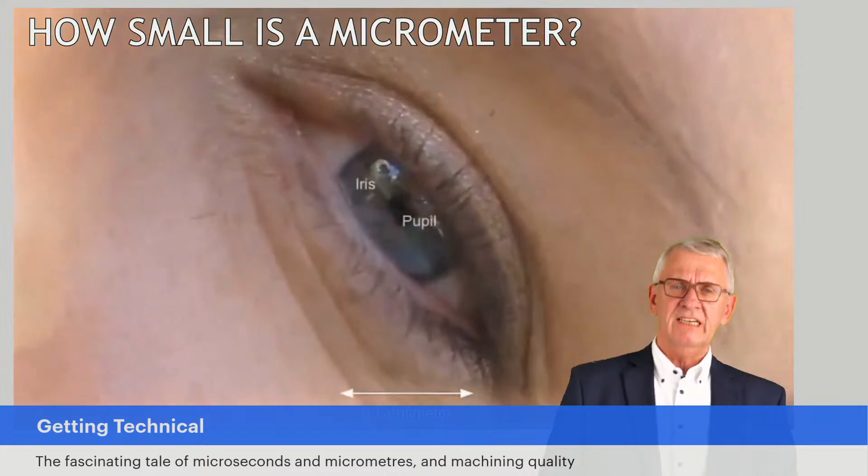And we talk about, as I said, microns. A micron is nothing, but chasing a micron, being it a micrometer or a microsecond, can cost a fortune. And we have to realize that whole discussion about quality, and micron here and micron there, is a matter not only of technical stuff, it's also a matter of money and time. Let's first put things a little bit in perspective.

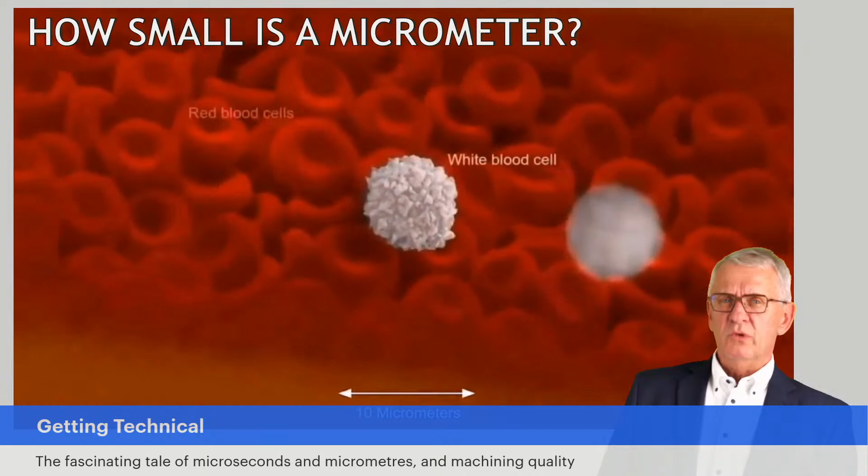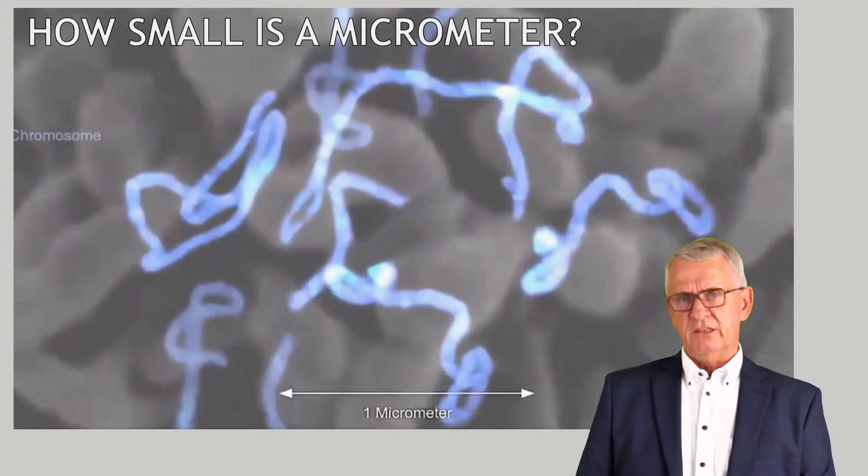If we talk about a micron, a micrometer, normally what we talk about is on the level of chromosomes in the human body. That is what we are talking about. That is what 1 micron is. So if we have a discussion in the machining world, if machining people are standing together and they are talking quality and dimensions and stuff, and a micron more and a micron less, we should realize that what we talk about is very, very, very tiny.

And if we talk about a microsecond, also here to have an idea what we talk about, a microsecond, if you compare a microsecond to a second, well, it's the same type of comparison like of a second within 11 and a half days. And people say then, 1 second compared to 11 days, that's nothing. Exactly, that's my point. A microsecond, if the discussion is about microseconds, and I think here on things related to machining time and time in contact and all those things we discuss in machining, be careful when you use the word micron, micrometer, or microsecond. It's very, very, very little.

And as I already said, it refers to quality. And quality, most of the time, when we talk about quality, there is that sense of, how should I say, a feeling of, is it all really needed? Because quality costs money and time. And there is that constant chase for cost reductions and increased productivity. So quality, but it costs money and it costs time.

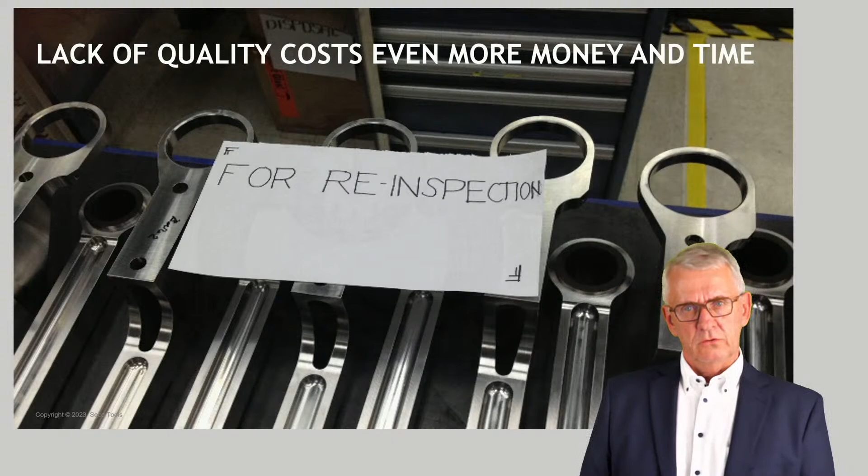But you have to see it like this: lack of quality costs even more. So it's not a matter of discussing how much quality costs or how long it takes to reach a certain level of quality. It's more a discussion of, if you don't have it, quality I mean, what is it going to cost you then? Being it in money or in time.

And money and time is one thing, but quality, or the lack of quality, it's a bit like that traditional comparison. People say it's like an iceberg. There's a little top of it above the water level where you see things, and then people say, when you talk about quality, lack of quality, it's about scrapped work pieces and rework that needs to be done and all that type of stuff. But lack of quality is so much more.

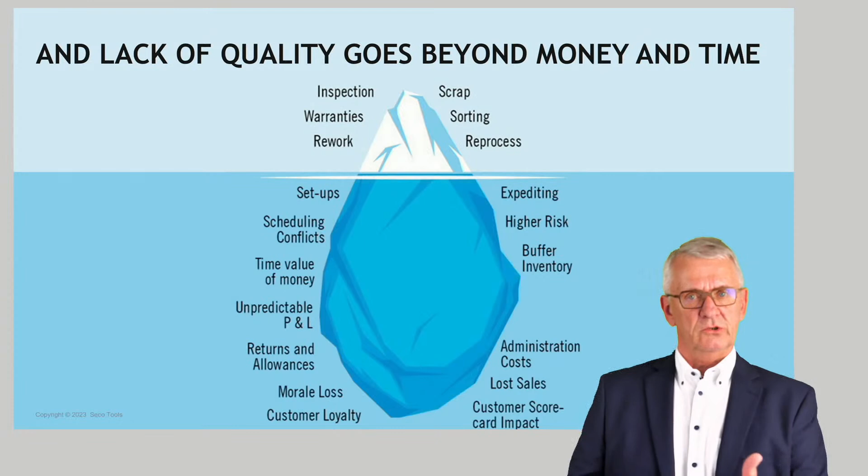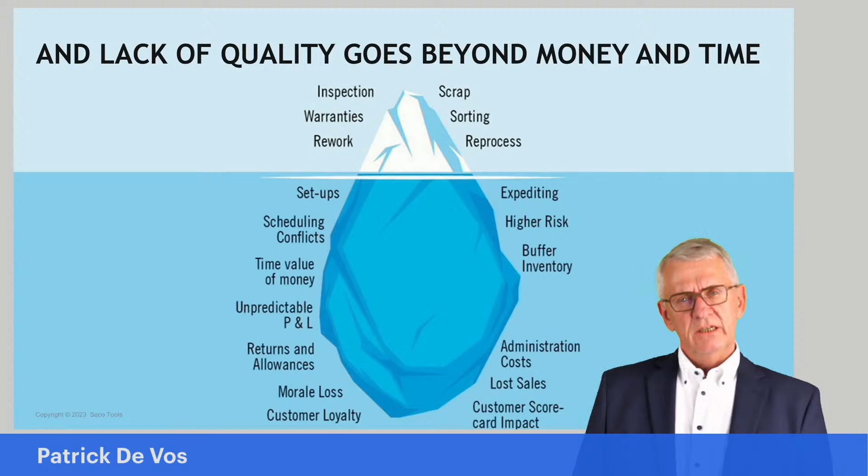To take one example, perhaps people are not always thinking that delivering lack of quality is going to cost you image. Because if you deliver a workpiece which does not have the quality which was requested, you are not only going to have a customer calling you and saying this is no good, but you are also going to have a customer starting to doubt you as a supplier of workpieces or whatever you produce in your company. So lack of quality is costing a hell of a lot of money, time, and so much more.

So we better spend some attention to it. And if we talk about quality, there are in machining, or in manufacturing in general, perhaps two families of quality. One refers to the process quality, the manufacturing system quality. That is when we start talking about the process we use to produce workpieces, in our case machining, and to which extent does it deliver what it is supposed to deliver. And that is correctly finished workpieces, and I'll come to that part within a second, but also correctly finished workpieces in the predestined or pre-calculated time, with the different cost factors related to it respected, and so on and so forth.

And if we start talking about rejected workpieces, a percentage of rework, extra processing, all that type of thing, that refers to what I call the quality of the process, the quality of the production system. That's one family. Another family is the very straightforward workpiece quality. Are the dimensions correct? Is the shape correct? Is the surface roughness, the surface integrity?

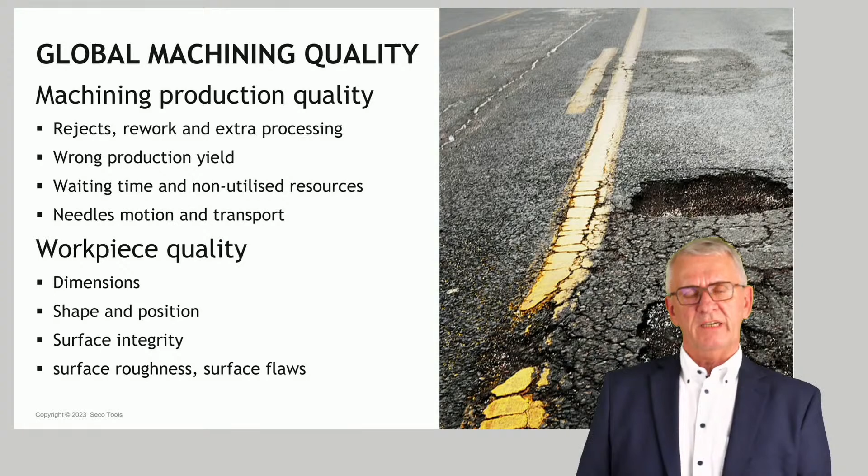Are all the demands which are around the workpiece respected? Then we talk about workpiece quality, and the main subject of today is workpiece quality. But still, I want to mention a few words on production quality, process quality, because this is more about

if you look to the process itself, the production system itself, to which extent does it manage to deliver without too many rejected workpieces, or without too much unexpected downtime, without too much problem solving time that is slowing down the process, all those type of things that in the end would influence the total cost picture, the total manufacturing cost, or the total productivity figure. Those things, that is what we refer to when we talk about production quality.

Production quality is about how well do we spend our time? Do we spend the available time we have for production? Do we actually spend that as much as possible to produce correctly finished workpieces? That one could define as production quality.

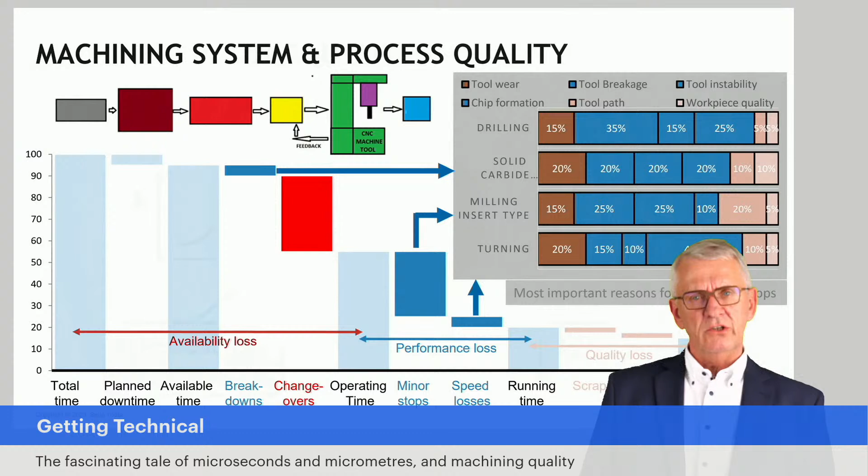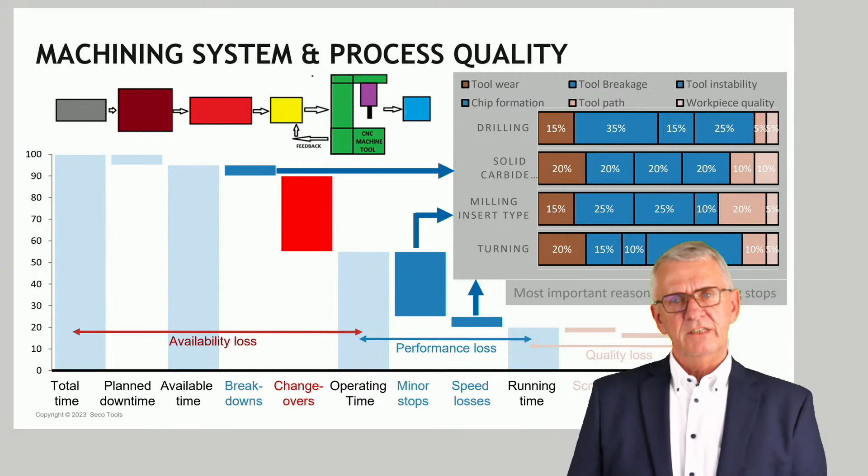And if you look to the process itself, the technological side of it, there it's about to which extent do we manage to run the process, the machining process, without too much unexpected things happening that would lead to unforeseen standstill. To which extent do we manage the production process, the machining process, that we don't break too many tools? That the quality of the finished workpiece is in line with expectation, that we have to stop the machine because there are issues with too long chips, all those type of things,

that is connected to process quality, production quality. It's about mainly trying to avoid those things, or at least minimize, so that the available time on a machine is used to do what it is supposed to do, correctly finished workpieces. That in a nutshell. There's so much more to be said about this.

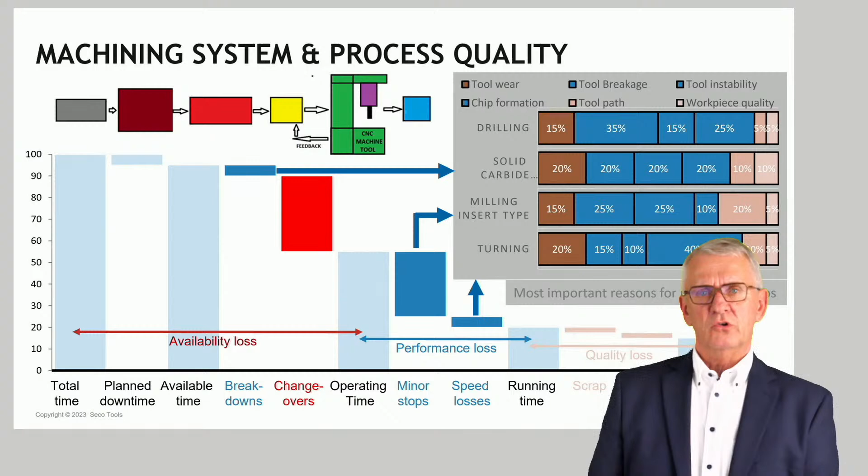If we talk about production quality, production system quality, a word that pops in my head instantly is what people refer to as manufacturing excellence or production excellence. Perhaps we could say production quality is a bit the same as manufacturing excellence, or I don't know. It's just something I put on the table here to think a little bit about.

But as I said, the main subject of this session is workpiece quality. Now, if we talk about workpiece quality, we have to finish a workpiece or a batch of workpieces, and those workpieces, there are demands. There are demands about the dimensions. There are demands about the shape of the workpiece. There are demands of the different features or elements in a workpiece, how they are positioned compared to each other.

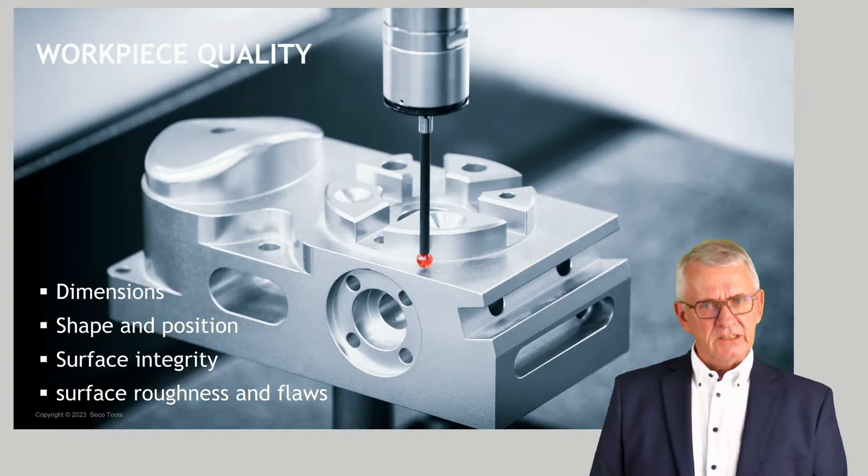There is the aspect of surface integrity, which is a very important thing in some types of industry. I'm thinking here mainly on industry segments like aerospace, medical industry, where surface integrity is a very major thing. There is the surface roughness, surface flaws, all those things. That is what we talk about when we talk about workpiece quality.

And workpiece quality, what we have to realize is that it's an equation with quite a lot of variables. And if you try to rank the variables, at least in families, part of the quality of a workpiece will be depending on the tooling you use, the type of cutting tools and how you use them, and the cutting conditions and all that type of things.

Part of the quality variables are workpiece variables. The workpiece itself, the material, the shape, the dimensions, type of material, as I already said, and so on. Part of the variables comes from the machine tools you use while they are cutting. How accurate can they move? How stiff is the structure? To which extent are the machines capable of running without vibrations? All that type of stuff.

A number of variables are also coming from machines, but machines while they are not producing. Perhaps a very strange family of variables, but what I try to put under that umbrella is when a machine is standing still, that is, for instance, perhaps because you are mounting a rough workpiece. Now, the accuracy with which you mount a workpiece is a variable, is an influencing factor for the final quality of the workpiece. And that accurate mounting of workpieces is something which is done while the machine is standing still. That explains a little bit what I mean with the variables in the family coming from the machines during downtime.

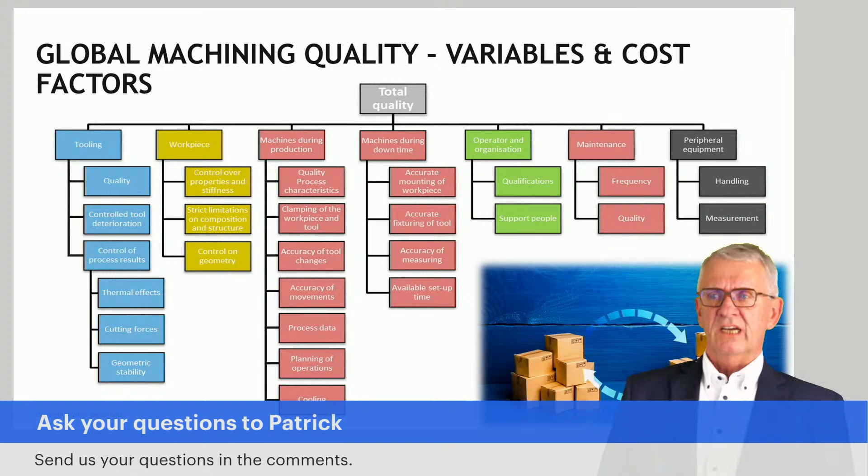I've been talking about process quality and about workpiece quality. It's typically human to classify—we always like to rank what is highest priority and what is not. Now, if you think about these two types of quality, workpiece quality or process quality, what do you think is the most important one? If there is a conflict, which one should be prioritized? That's what I mean here, because sometimes there is that conflict.

To reach a certain level of workpiece quality, you may have to sacrifice some process quality—spend more time, incur higher cost factors, and so on. So put it in the comments, I'm always curious how people feel about this. Is it workpiece quality, or is it process quality that's most important?

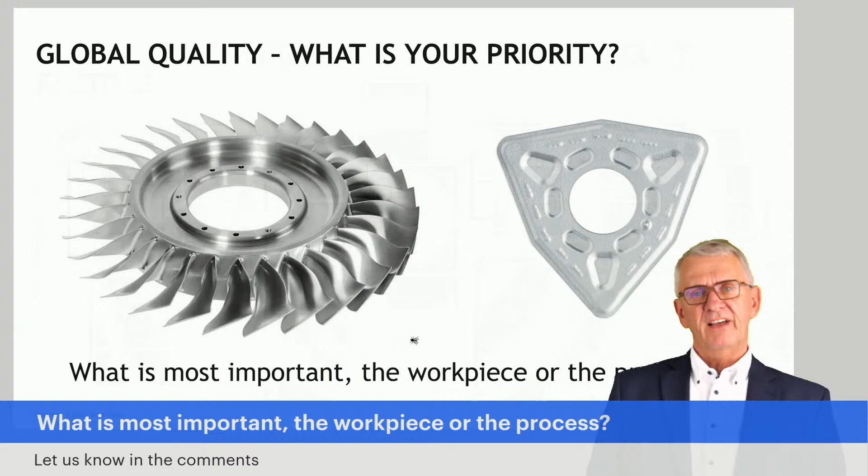Perhaps we should answer this question in the opposite way. What would be the consequences if we don't manage the quality, if we fail to achieve the needed quality? Think of delivering a workpiece with compromised quality—the result could be that the equipment it's used in, say an airplane, fails to function. And we all know the consequences of that. If, however, the process fails and the tooling costs go beyond what was determined, well, that's unfortunate, but there's no more to it than that.

So if the question is raised, what do we prioritize—workpiece quality or process quality, technology or organization? I think workpiece quality should be the highest priority, if you think about the consequences. As I said, I answered this in a negative way: what would happen if I don't have the quality I need?

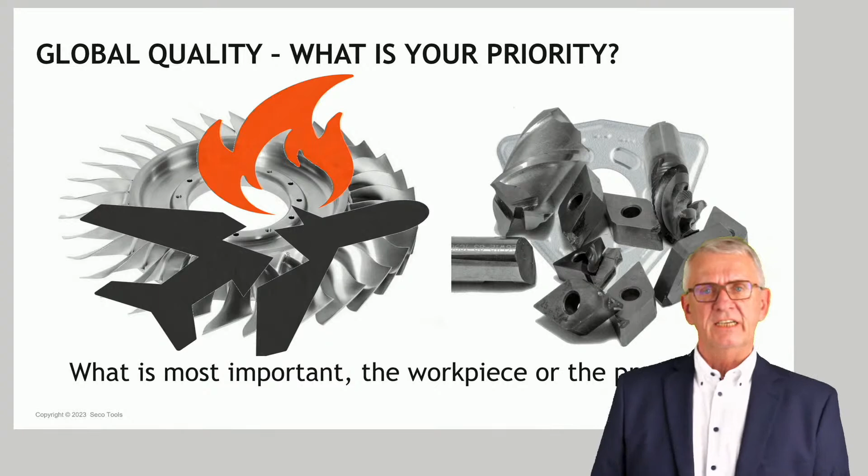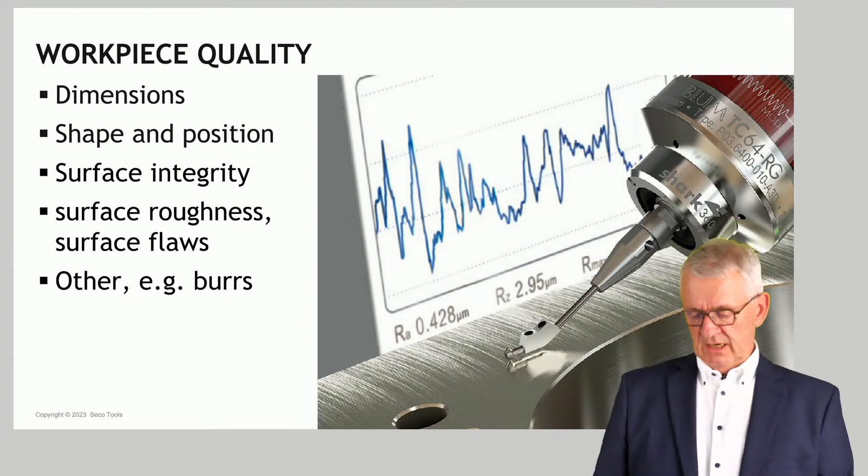Workpiece quality is the main subject here. There are quite a few things we should talk about: dimensions, tolerances on dimensions, shape, the position of certain features on a workpiece, surface integrity, surface roughness, surface flaws, and other elements like burrs—exit burrs, micro burrs, and so on. If we try to classify: dimensional quality, shape quality, and position quality. In other words, do I manage to machine a surface so that it has the correct shape—flat, cylindrical, or whatever is demanded—that it is positioned where it's supposed to be, and that it has the dimensions we ask for within given tolerance bands.

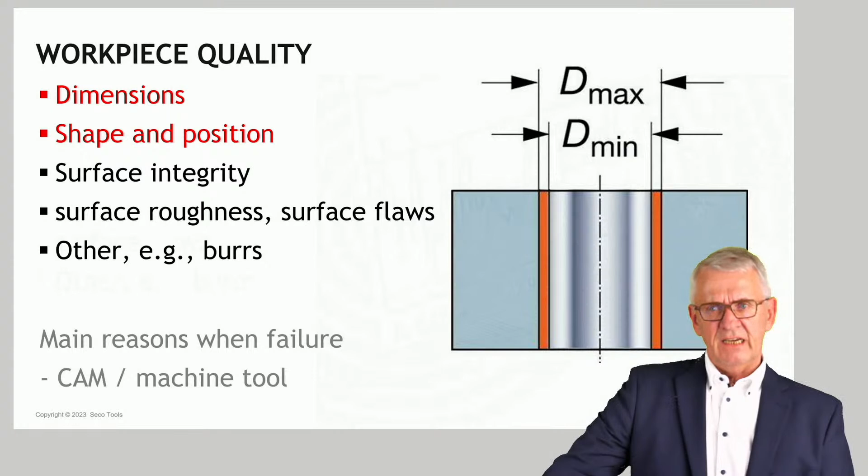And if we fail here, what's important is: okay, I did my machining, I check the result, I see the result is not in line with expectations, so I need to correct. The main reasons—not the only reasons, but the main ones—for issues with dimensional, shape, or position quality are the machine tool itself, and what I call CAM here: how you determine the movement of cutting tools over or into a workpiece.

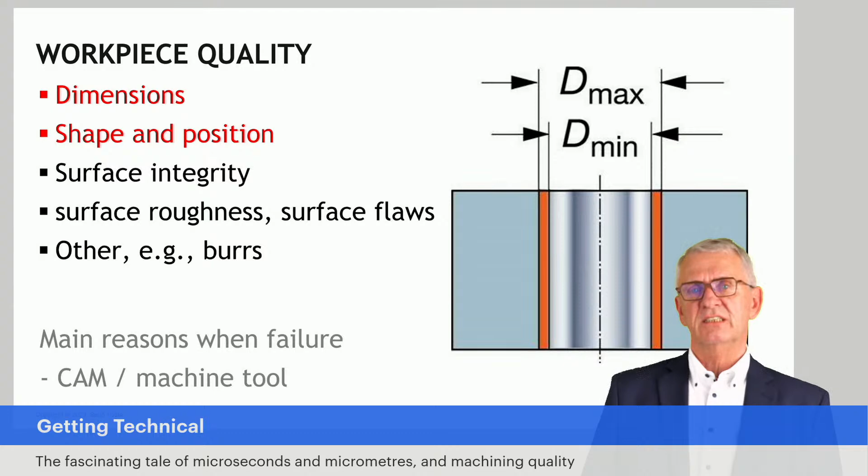Now, I'm pretty sure quite a lot of people now throw up their eyebrows and say, wait a second, what about this and what? I know, but mainly if you have big issues here, it's about machine tool accuracy, stability, movements, and it's about how the tool is part of it. Is it accurate? Is it what it's supposed to be to generate a certain form?

Surface integrity. Now, surface integrity and surface roughness, I always have a bit of a problem here, because depending on who you ask, for some people, surface integrity and surface roughness are two different things. For other people, one is part of the other. So for the moment, let's keep them together.

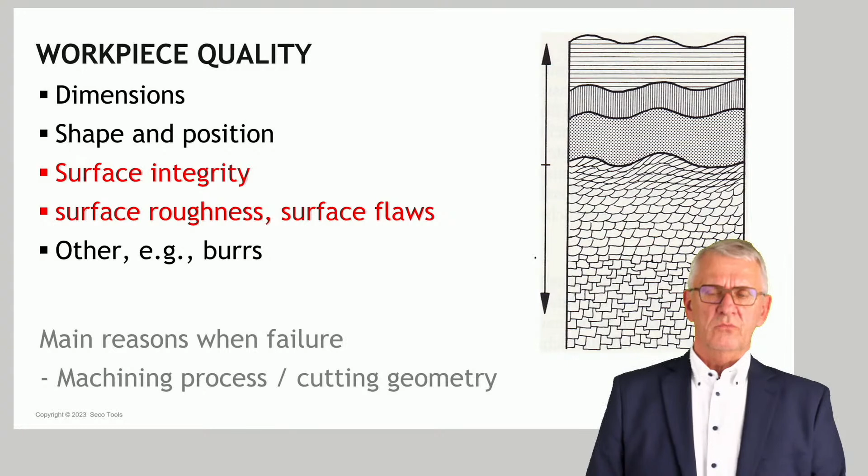If we have issues with surface integrity, surface roughness, or surface flaws, the main reason is the machining process itself. The phenomena happening during machining are such that the machined surface is not in line with expectations, and or closely related to it, it's about the cutting edge geometry. Don't worry, I'm going to come back to that. But clearly, if we are unhappy due to integrity, surface roughness, or certain surface flaws we see, we have to look at the machining process and see what went wrong, and or the cutting geometry of the tool we used.

Now, surface integrity is defined as describing the properties and the condition of a machined surface with regards to the surface itself and the subsurface, the part just below the surface. And here, as I said, some people say, yeah, the shape of the surface topography is part of that, because it's the condition in which a machined surface is. There are arguments to accept that.

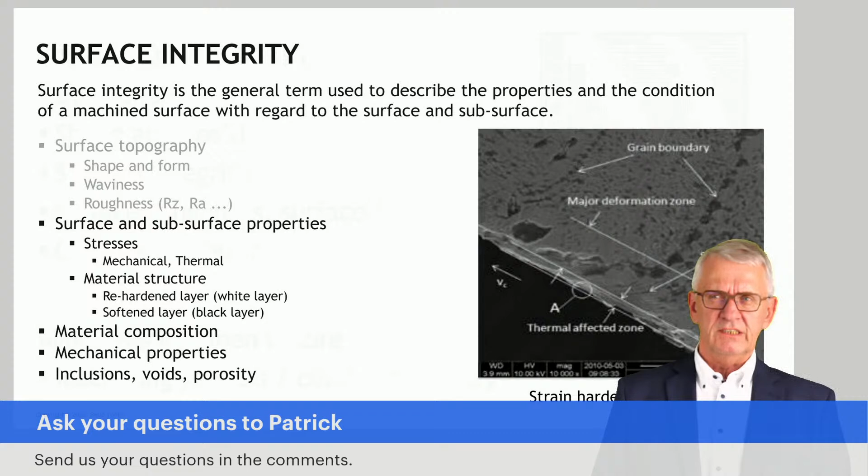But personally, I feel more to say that surface integrity as such relates to the material. The material which we see on a surface, the material which we see just below the surface after being machined. Did we change the structure? Did we change certain properties of the material? Did we leave certain stresses or tensions in the material? Did we add or modify the composition? All those things, that is what for me is surface integrity.

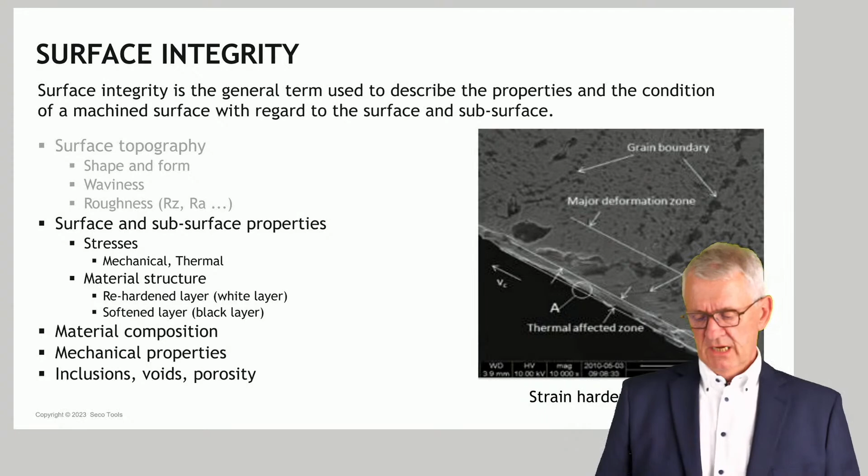Surface topography, surface roughness is a different thing. In other words, if we talk about surface integrity, it's more a metallurgical thing. It's looking into the structure of a material after it has been machined and evaluating if the surface material, or the material just below the surface, has been changed, and if the changes are acceptable or not.

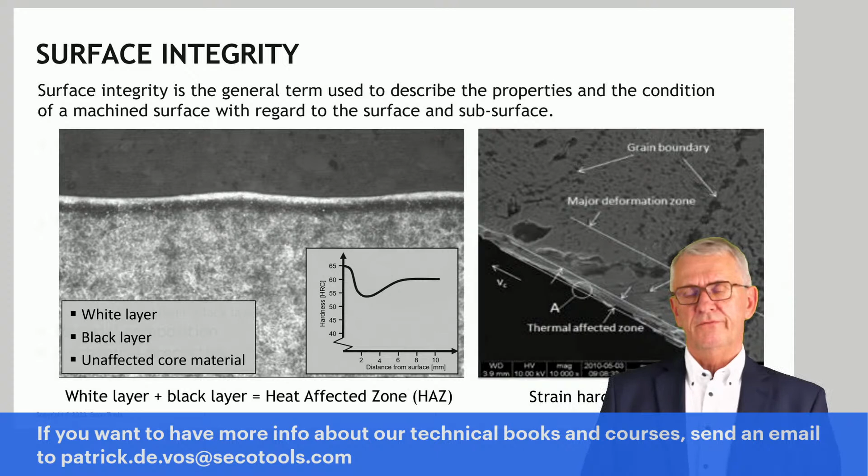This is the domain, and some of you are most probably familiar with it, where people talk about a white layer or a black layer forming after machining, or the heat affected zone in a surface. Very typical, you find this type of discussion with people in, for instance, the ball bearing industry. People in aerospace talk about these things. The medical industry, where a workpiece is going to be put in a human body, and then the material as such is an important thing. That is surface integrity.

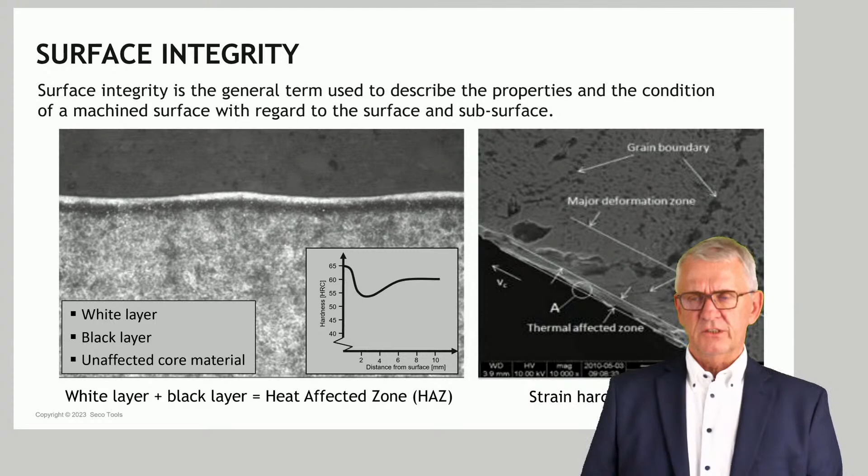And then you have burrs, which is quite an important thing in machining. There are different types, but this is a subject on its own, I just want to mention it here. Surface burrs which are formed during or after machining. Also here, if you are aiming for what people refer to as burr-free machining, so no burrs are being formed during machining, one could say, yeah, what's the big problem here? If a burr is formed, an exit burr or something, afterwards you remove it, end of story. Now, be careful with that, because if you look into that simple thing, burrs are being formed during machining and you have to remove them afterwards, which is referred to as a deburring operation.

A deburring operation costs money, takes time. I once had a case with a customer, and the production manager there told me that deburring as such stood for 20% of the production costs. And then we talk about serious stuff. Now, if you are in that case, if deburring is an issue, there are two ways you can work.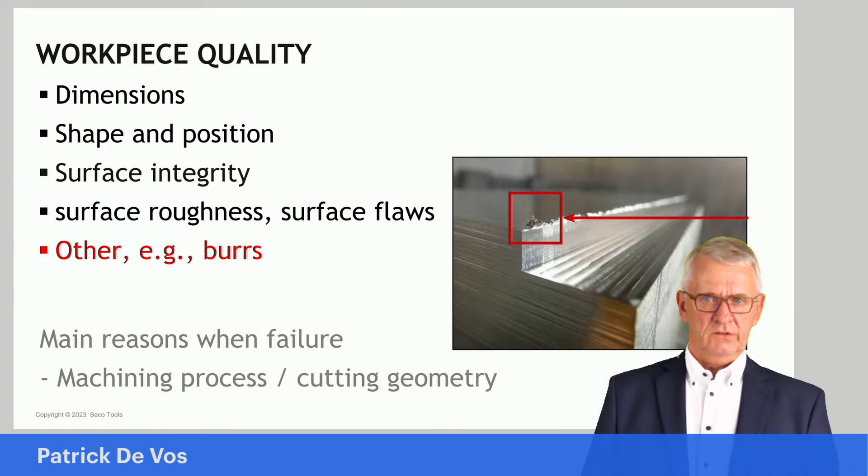Burr formation is very clearly related to the machining process itself, and also the cutting geometry of the tools you use. Those are the two things we need to discuss when we talk about burr formation.

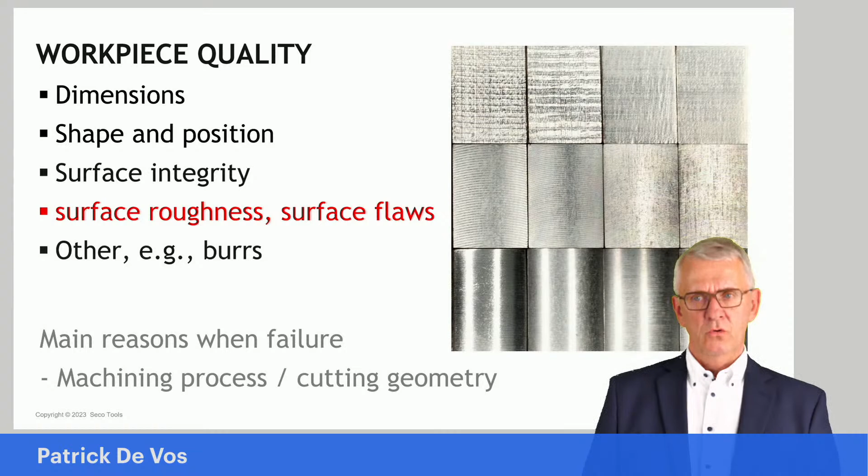But let me go back to surface roughness, surface flaws. As I said, some people consider it part of surface integrity. Me personally, I feel more inclined to call it a chapter on its own. And to fully understand surface roughness and flaws in a surface, we need to dive in a bit more into the machining process related to the workpiece material being machined.

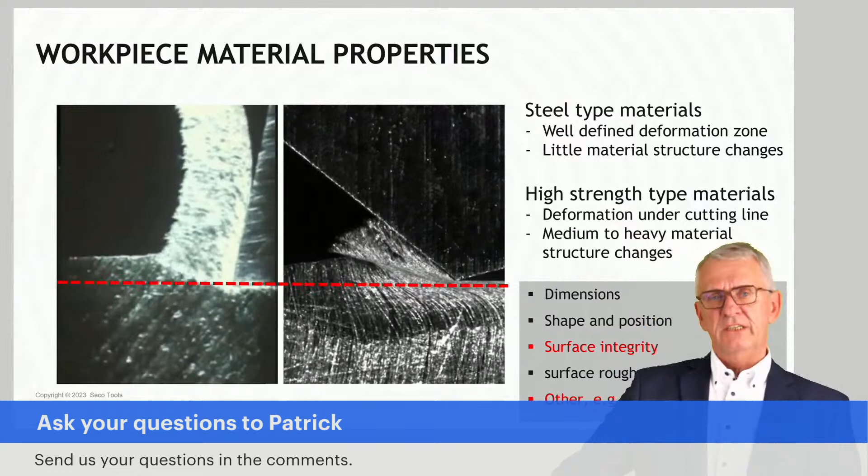You see here two videos demonstrating two types of machining processes. To the left, you see a machining process in steel type materials, the classic, traditional approach. We see machining taking place here, a tool is pushed through the workpiece material, the material is deformed, it's sheared off and evacuated in the form of a chip. The red dotted line represents the machined surface, and what we see is that the surface is rather smooth.

To the right, it's not really a simulation, it's actual machining you see there. What I try to simulate with this video is how machining takes place with high strength type materials, typical heat resistant materials, high strength, Inconel type materials. A machining process leads to a certain deformation taking place under the cutting edge line, which kind of represents the machined surface. Due to the nature and properties of certain materials, the workpiece material itself is being deformed below the surface, and that deformation leads to different properties of the material.

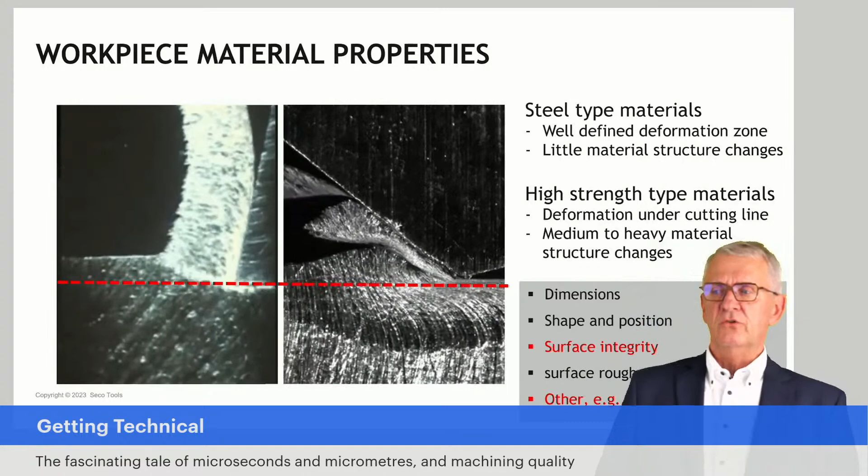Now, this is a very simple thing: it's either acceptable or not acceptable. If it's not acceptable, and here we talk more about surface integrity, then we need to do something about it. The phenomena I'm drawing your attention to here has a high impact on surface integrity and surface flaws. Certain parts of a surface can look a bit awkward when this takes place. This will influence burr formation, which is what we have to think about here, very strongly connected to this phenomenon.

And people would ask me, okay, you talk about high strength materials, why high strength materials? What makes them different from others? Well, that's the strain hardening tendency of those materials. If you look at machining, machining is a deformation process. You deform material until it shears off, and that deformation of material, what I try to visualize here with this little movie, you see just below a cutting edge that the material structure is being deformed.

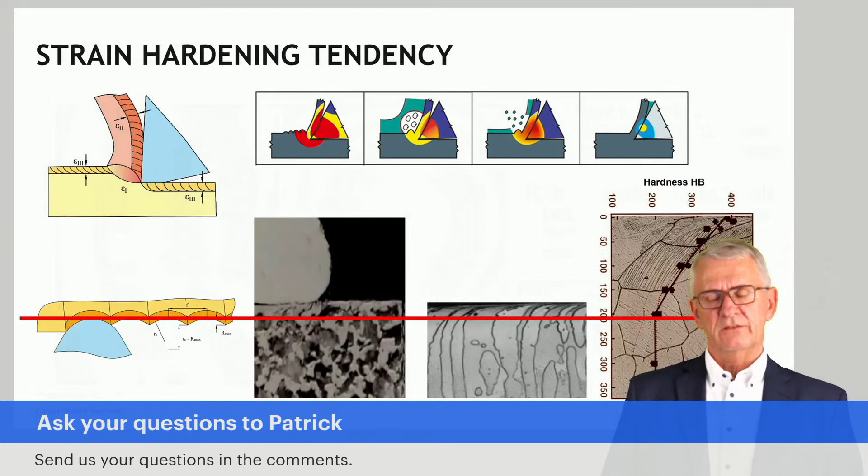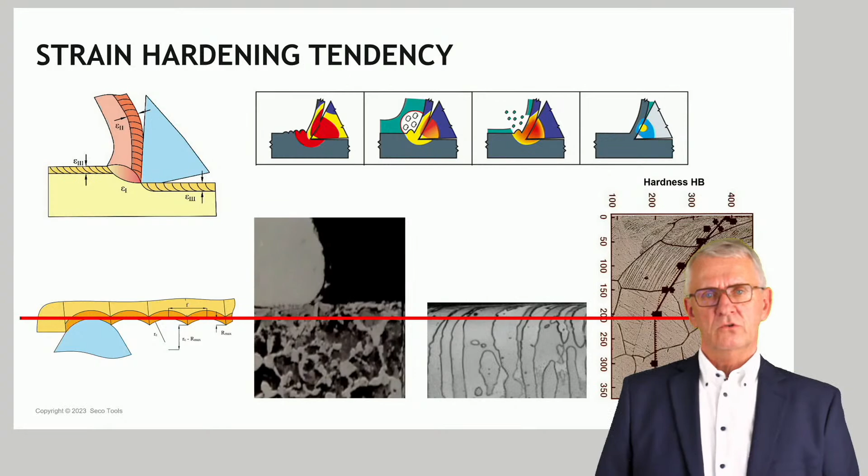This strain hardening tendency we see in a number of materials. Temperature is a catalyst for this. So if we dive into this situation, the whole discussion we have in machining about whether to use cooling or no cooling relates very much to this aspect in machining. When we have strain hardening tendencies, which we find quite a lot in high strength materials and heat resistant materials, the whole discussion about cooling, no cooling, which type of cooling, is a very important one.

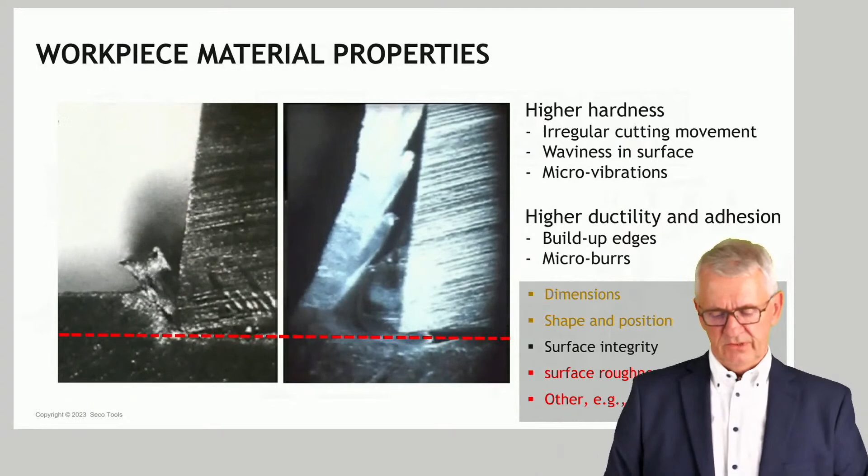It moves a bit randomly, and that movement, that relative movement, is going to affect the form of a surface. If you machine softer materials, the example here is aluminium, and if your cutting conditions or your cutting geometry is not what it should be, and you end up, for instance, in a situation where build-up edges are being formed, what you see happening here on the video, again, you see that the machined surface, just below the dotted red line, the shape of it, the form of it, starts to be very irregular.

So, hardness of workpiece material, softness of workpiece material will have an impact on surface roughness, surface flaws, and burrs. Also, of course, some other quality things will be influenced, but these will be the main ones: surface roughness, surface flaws. In other words, if we talk about surface quality, if we talk about workpiece quality, the material aspect is always there to take into consideration.

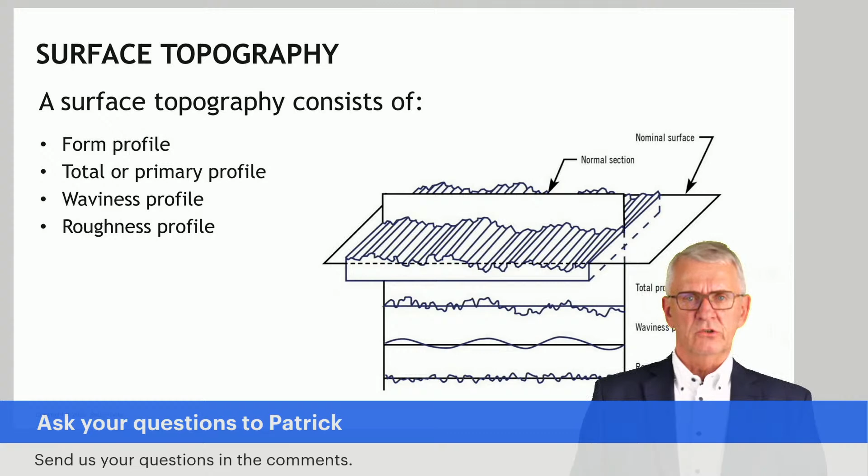Whatever we say, we always have to talk with two words, and if we define a certain principle, if we say this and this and this, what we always have to mention is this and this and this in this type of workpiece material. Now, surface roughness as such, what we talk about is actually the form of a surface a bit on micro scale. That is surface roughness. Some people refer to it as surface finish. I never know what I should say. Is it surface roughness or surface finish? But I'm pretty sure you all know what I'm talking about.

Now, the exact profile, if you would take a microscope and you would look, what is also referred to as the primary profile, part of that profile is the so-called waviness profile, which is considered, if there are issues about that, as a form quality thing. The waviness profile is coming from the machine tool itself, the stiffness, the stability, all that type of stuff.

Now, if from the primary profile you deduct the waviness profile, in other words, a bit what you do, you take the exact profile and you take two parts and you pull. So you straighten the waviness profile. By doing that, what is left is referred to as the roughness profile. Now, if we talk about surface roughness, surface finish, what we talk about is the roughness profile. So it's the primary profile from which is deducted the waviness profile.

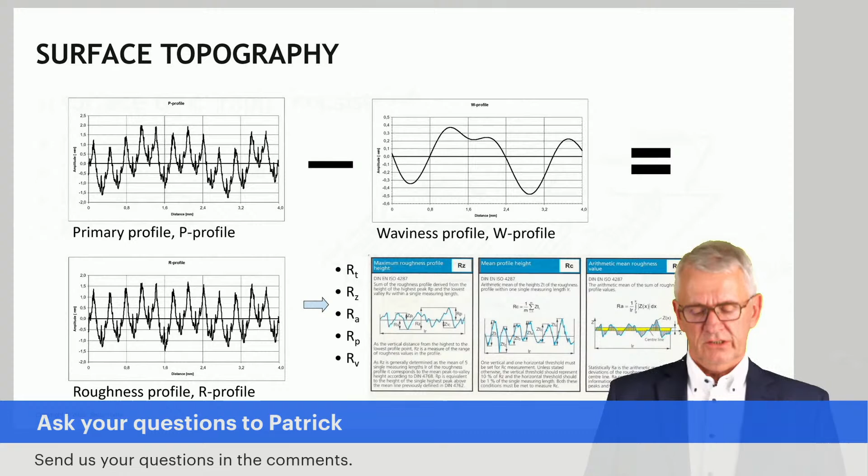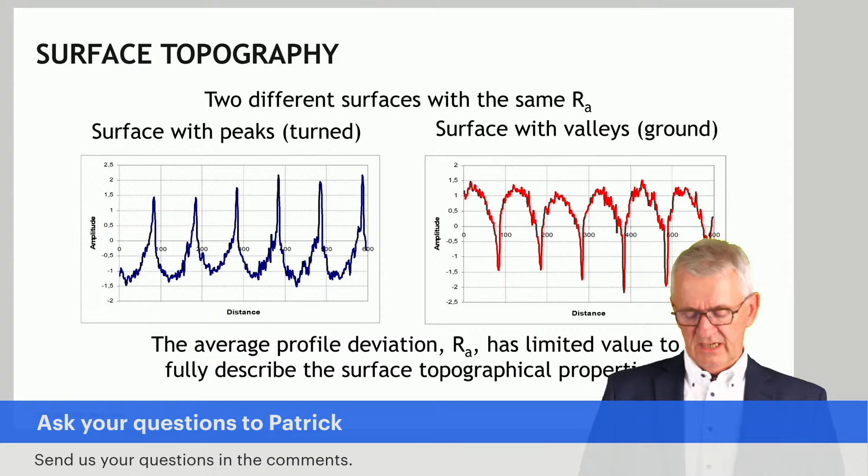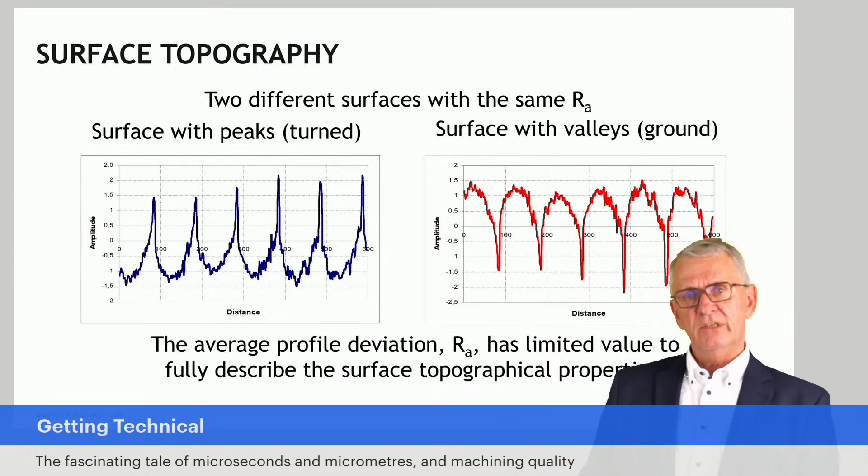But anyway, what you see here are two examples of a surface with the same Ra value, yet the surface, if you look at it, looks completely different. So I give this as an example to show you the relativity of things. Ra in different types of applications, an Ra value after turning, after milling, after drilling could be completely different types of surfaces. So again, if we talk about an Ra value, we should talk about it in relation to an application, turning, milling, whatever, and in a certain type of workpiece material.

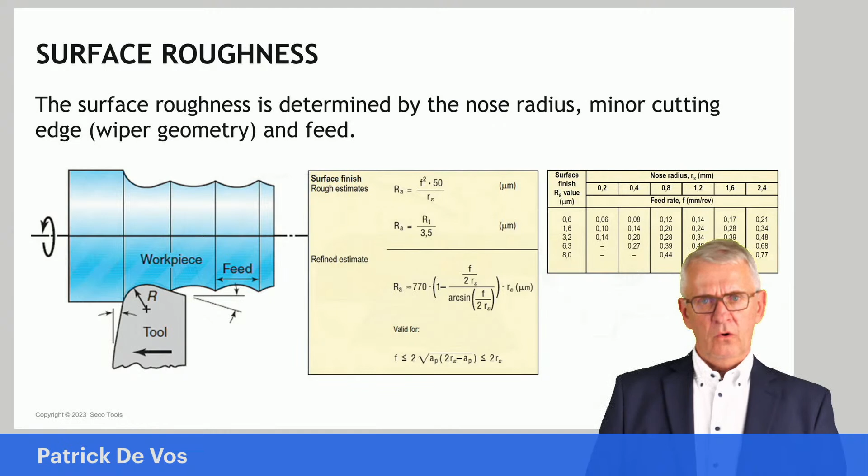Now, traditionally, what people use here is a geometrical approach. They say, I have a tool with a certain nose radius, point radius. I move that tool with a certain feed over a surface. I leave kind of a curved surface behind, and that we define as the roughness profile. And with that roughness profile, there are all kinds of methods or approaches to work. You can do it mathematically, what you see here in the middle, with simple or more complicated formulas, whatever you want. Or you can work more pragmatically, with tables or diagrams, where we say there is a certain relation between the point radius, the feed, and the surface roughness.

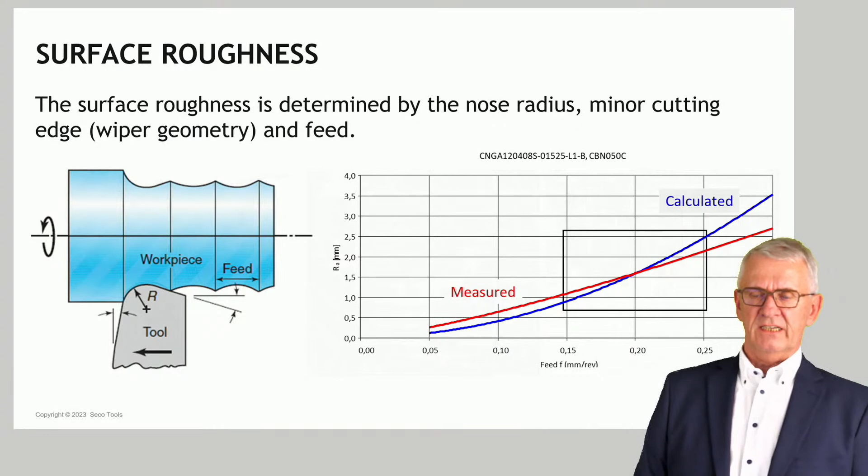And it's all very nice, very well. And if you compare then this model, this concept to calculate surface roughness, and if we apply it in reality, and if we measure it, what we see is there is a certain window in which those things calculated and reality are more or less in line.

But if you go with feeds, the example here referred to feeds, the horizontal line is feeds, the vertical line is Ra values, measured, the red line, and the blue line, sorry, is calculated. But what we see then is if the feeds are higher than what we define as the application window, the measured Ra values are below the calculated value. The surface is better than what we expected with higher feeds. With lower feeds, it's just the opposite.

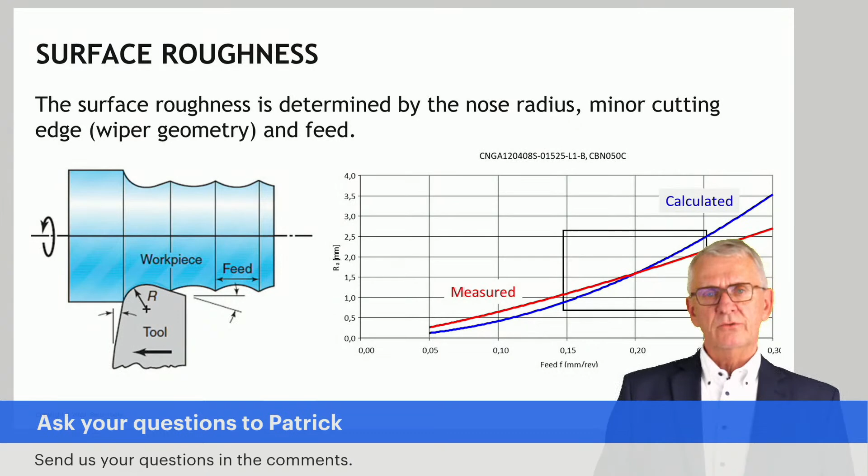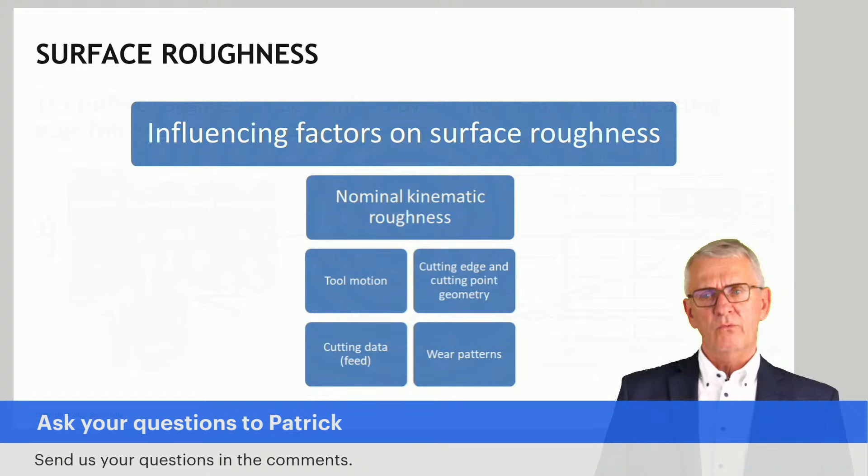And then the question, of course, is, can't we modify this model? Can't we make this concept more accurate? And yes, we can. But for that, we have to be aware that roughness is more than a tool with a radius that moves with a certain feed. Because if you do that type of approach, we talk about what academics call the nominal kinematic roughness. The roughness with a nominal tool, a standard tool showing no wear, no vibrations, nothing, a theoretical cutting tool that works in a workpiece and moves with a certain speed, the feed.

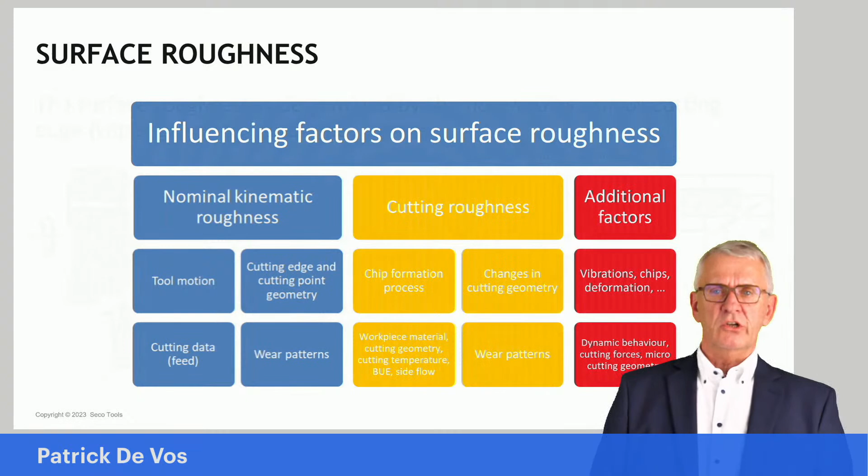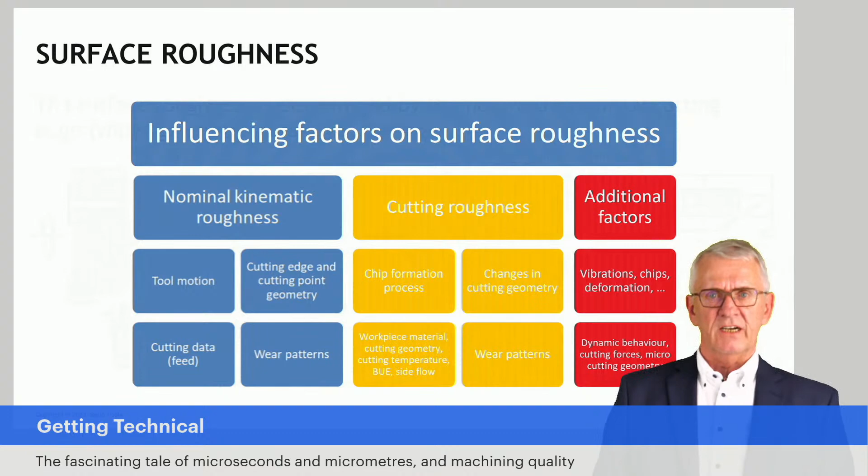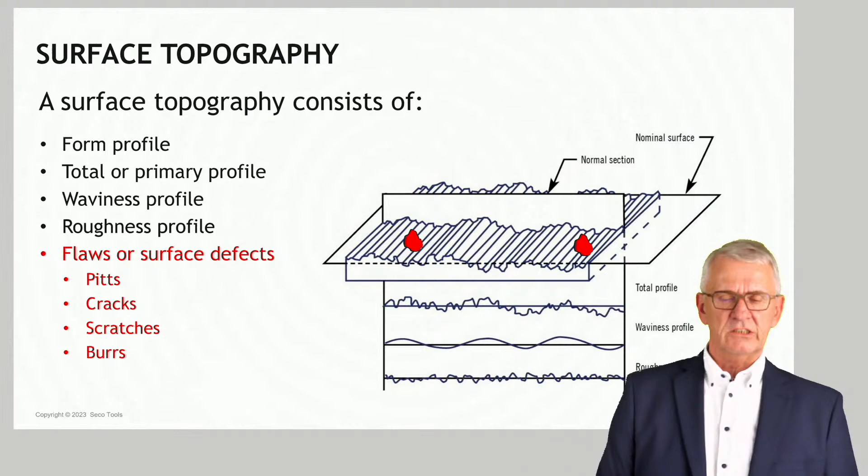But the reality is that is only part, because next to that you have the cutting roughness, as it is called, and that relates to the roughness that appears due to the cutting process itself. And you have, of course, additional factors. You have micro vibrations, you have chips that are hitting the surface, and so on. Now, those things we can call surface flaws. Surface flaws are irregularities in the surface. You find them here and there at random places. It could be pits and cracks and scratches and burrs. Burrs coming from chips hitting the machined surface.

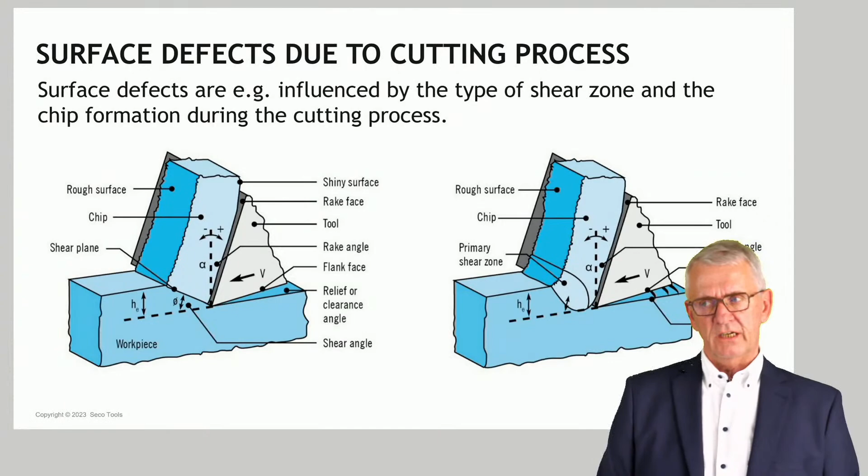Scratches. It can come from the actual shearing off of the material. If the shearing off goes below the cutting line, that will influence how a surface looks. It can come from side flow effects, what you see here. The little red thing that moves sideways compared to a cutting edge is going to affect how a surface looks. So all these things, being part of a machining process, are going to influence the actual surface of the workpiece material.

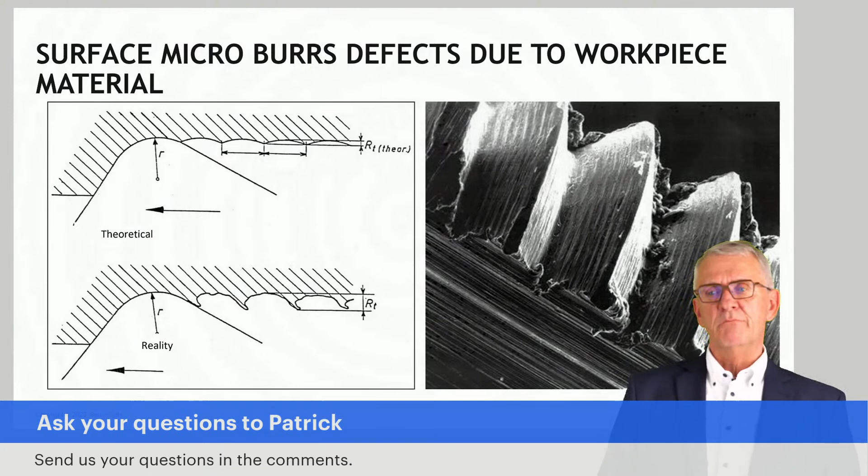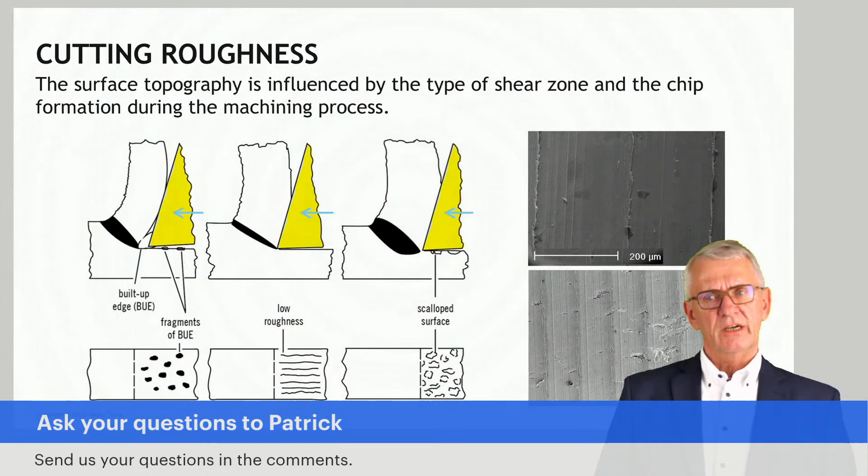What I try to illustrate here: on top you see the theoretical, a point with a radius moving with a certain feed leads to a certain roughness profile on a surface. But with certain materials, the example here is the somewhat softer materials, there will be microburrs formed, and those microburrs will affect the surface roughness. So cutting roughness is about how is the shearing off, is there side flow, is there built-up edge? All these types of things we need to take into consideration. And those things are mainly influenced by cutting temperatures and cutting speeds. A bit the same thing in this context.

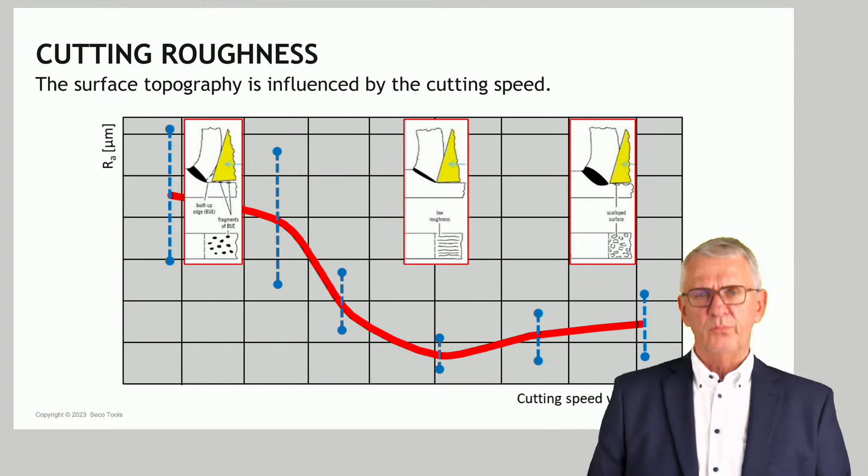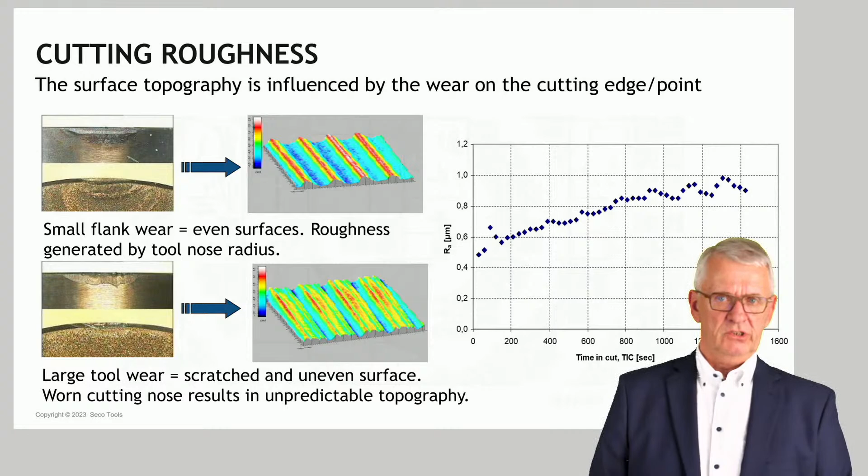So cutting speeds are important, and wear patterns, because we all consider a new tool when we make this type of consideration, but we all know after a while a tool shows some wear, and that wear is changing the geometry, the form of the cutting edge, the cutting point, and that of course is going to influence how the machined surface looks after a while. So machining time and wear we need to take into consideration. The feed, perhaps a very major one.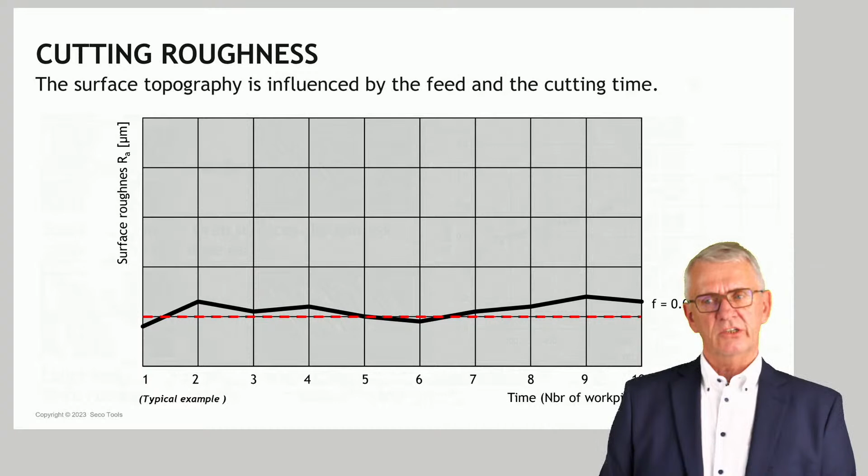What you see here each time is the theoretical value: the red dotted line represents, for a certain tool with a certain feed, what should normally be the theoretical surface roughness. The black line shows the surface roughness measured after one workpiece, two workpieces, three workpieces. So the horizontal line kind of represents time in cut. How long has the cutting edge been cutting? And what we see then is if I double my feed, double feed leads theoretically to double surface roughness, the dotted line.

If I take the feed again double, again my theoretical surface roughness, the dotted red line, will double. But if I look to the black lines, the measured ones, we see a very intriguing, very interesting phenomenon here, and that is, you remember a couple of slides ago, the higher the feed, the more we have a situation that the measured surface roughness will be below the calculated one.

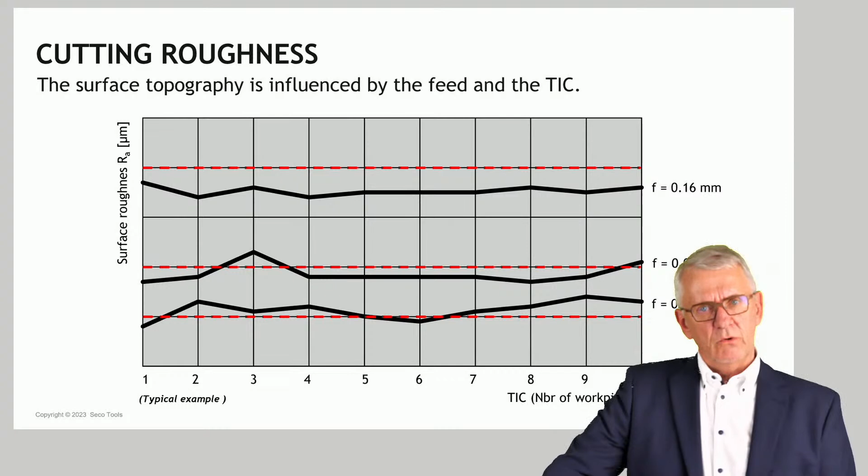And you could take this diagram as such. If you use a small feed, and if you have 10 workpieces, and if your demand is a certain surface roughness represented by the dotted red line, a number of workpieces will be correct and a number of workpieces you will have to reject because the surface roughness is above what is wanted. If you take the situation with a very high feed, all workpieces are acceptable in surface roughness. So reliability of the process, and here we touch on process quality, of course, is higher when feeds are increased.

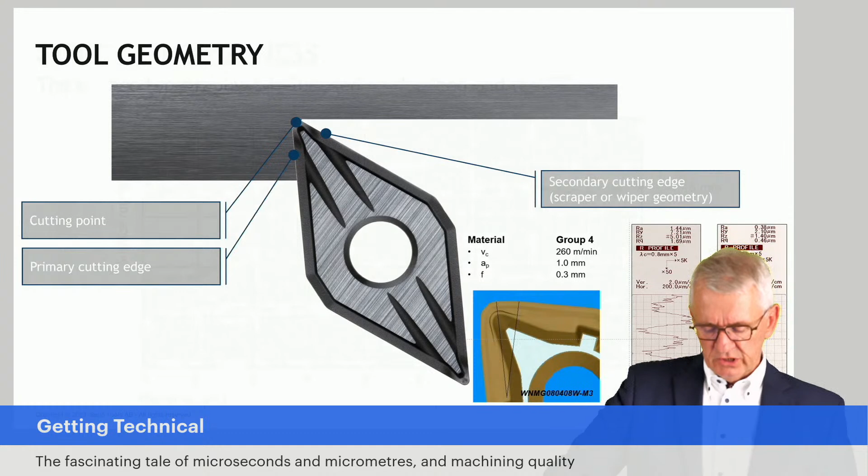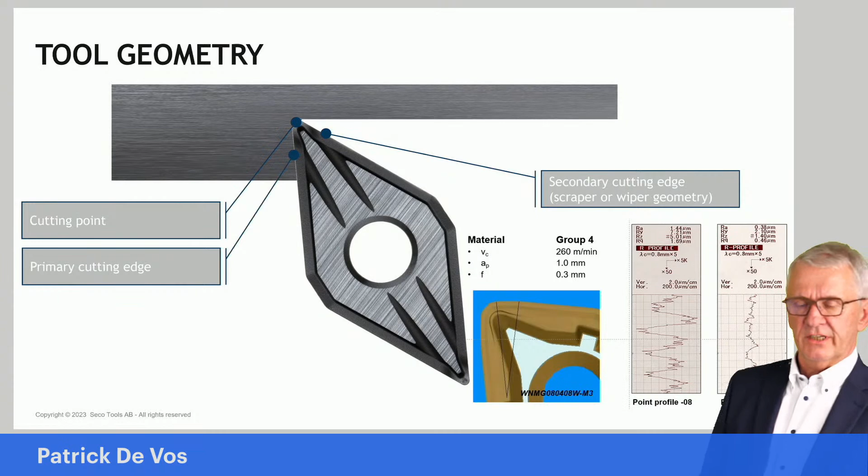Tool geometry, I take the example of secondary cutting edge geometries, wiper geometries as some people call it, scraper geometries is another word. What we see here is an example for a turning application: if you have a cutting point with a scraper geometry, what is shown here to the bottom right, a scraper geometry for the same tool with the same cutting conditions generates a surface which is much better concerning surface roughness. Just as an example.

This was very fast. Quite a lot of things we talked about. We discussed process quality, production system quality, where basically what we talk about is to which extent do I manage the process, do I have things under control so it leads to the wanted result, a correctly finished workpiece. That is priority one always, a correctly finished workpiece within the determined time and with the pre-calculated costs. If we fail there, then we have an issue with process quality.

Workpiece quality, which was the main thing here, and remember here we talk about dimensions and shape, position, surface integrity, roughness, and so on. And again, careful, surface roughness, we talk about micrometers. In the beginning of my presentation, I had kind of a waving finger here. Be very, very aware of what we discuss here when we discuss a micron or 2 microns.

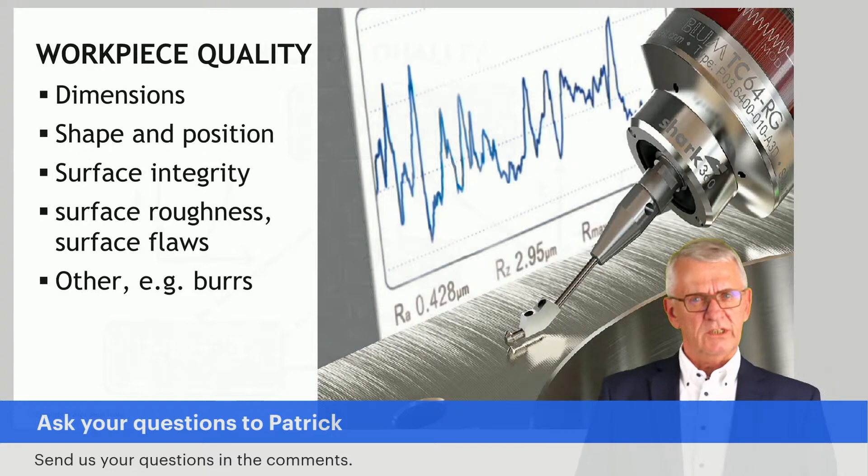The same for microseconds, for that matter. I always like to see time calculations where people start talking about milliseconds and microseconds. And then I think, do people really appreciate what they talk about? But okay, that's another discussion.

Very important. The core, what I tried to say here, is that if we talk about surface roughness, something which is directly related to a cutting tool, see things correctly. Go beyond what we refer to as the nominal kinematic roughness, the roughness which is theoretically generated by a point with a radius that moves with a certain feed in a certain workpiece material. It leaves that curved surface, and we say that's the surface roughness. Now, it's not as simple as that.

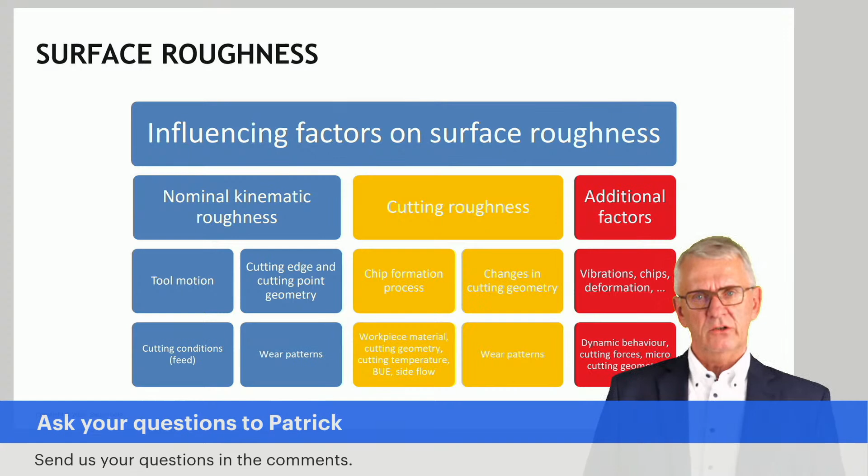You have the cutting process itself. There are certain phenomena taking place, influenced by the geometry of the tool, the workpiece material, the cutting temperatures, and all those type of things that, on top of the kinematic roughness, will also influence how the surface looks. And next to that, of course, there are all those other factors like chips scratching on a surface, micro vibrations that make a tool start to move in an irregular manner, and so on. So surface roughness, especially when you bring it down to micron level, is a rather complex subject in machining.

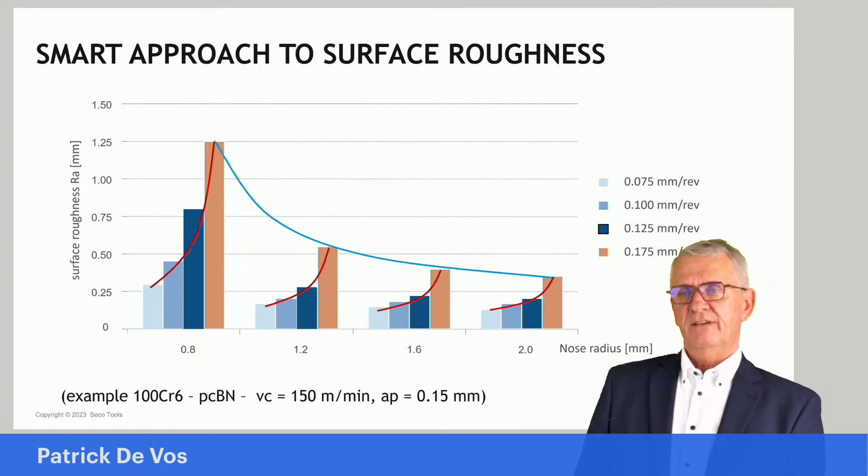And we like high feeds because high feeds are very favorable for a smooth cutting process. The more you have a nice balance between high feed and good surface roughness in a reliable manner.

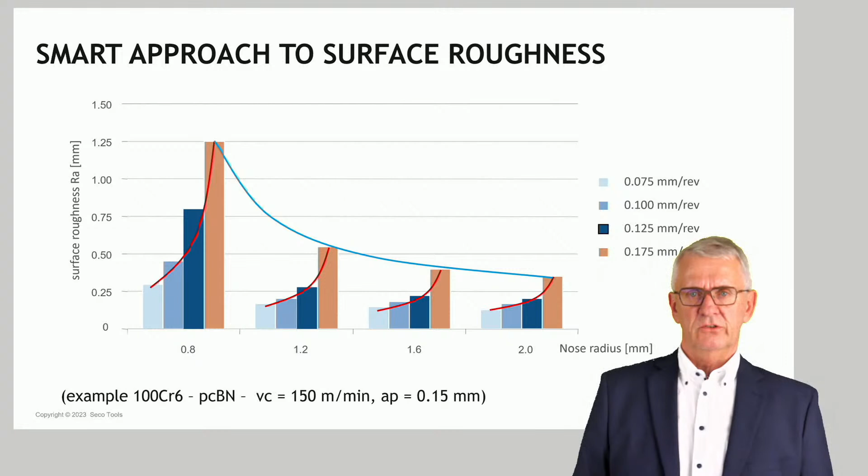So surface quality, surface integrity, surface roughness directly related to a machining process is a matter of juggling different things at the same time. It's more than just what's the nose radius. It's more than just what's the feed. It's how you combine things that is truly the secret of achieving good results.

I said a micron costs $1 million. A micron is 10 to the minus 6 exponent, and $1 million is 10 to the plus 6 exponent. A micron is very little, but chasing it could cost $1 million. I'm not pleading here for neglecting quality. I'm just saying let's all be very much aware of what we talk about.

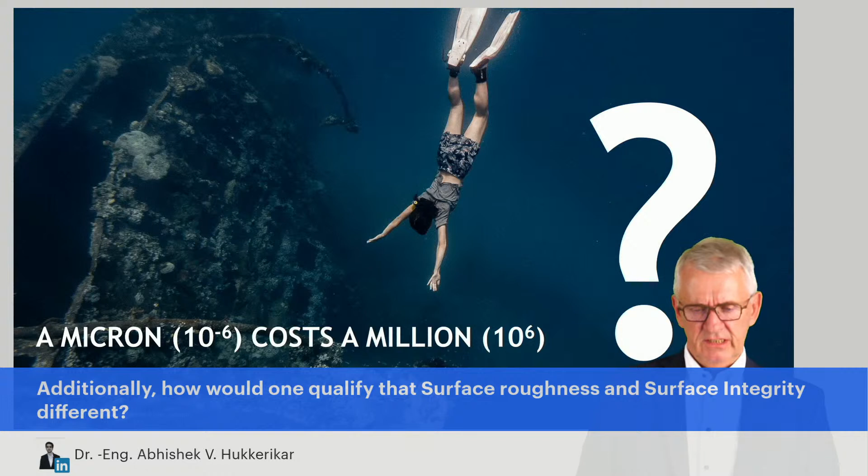Next question: is flatness more of a machine tool and fixture function rather than a cutting tool design and wiper geometry? Yes. However, flatness after machining relates to the stability of a machine tool. Indirectly, if you selected a cutting method that leads to high cutting forces, that will be a bigger challenge for the stability of a machine tool than lower cutting forces. So flatness relates to stiffness of a machine tool indirectly. However, if you feel there is a lack of stiffness in a machine tool, you should modify your cutting process and cutting geometry such that you lean less on the stability of the machine tool.

The next question: does this approach change when you are micromachining? No. The values will be different, and the windows of application of certain equations and models will be different, but the general phenomena we were talking about are the same.

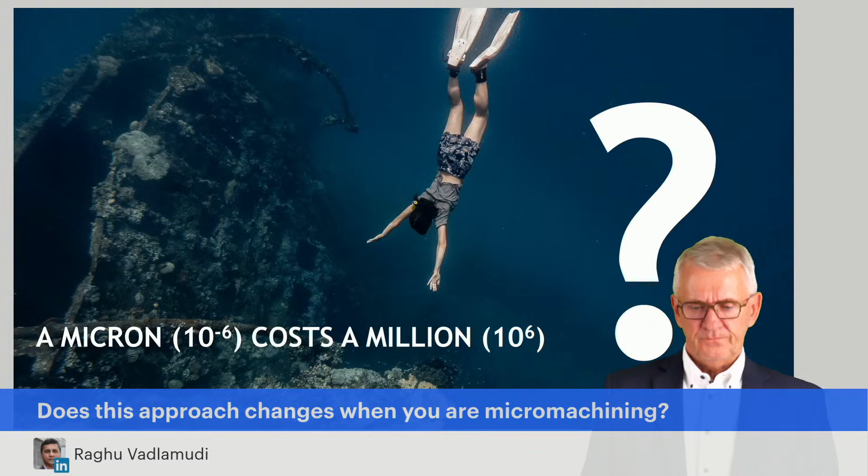Then there is, I don't know if it's a question or just a statement. Are we hunting for tolerances, or are we hunting for parts that work under most expectations?

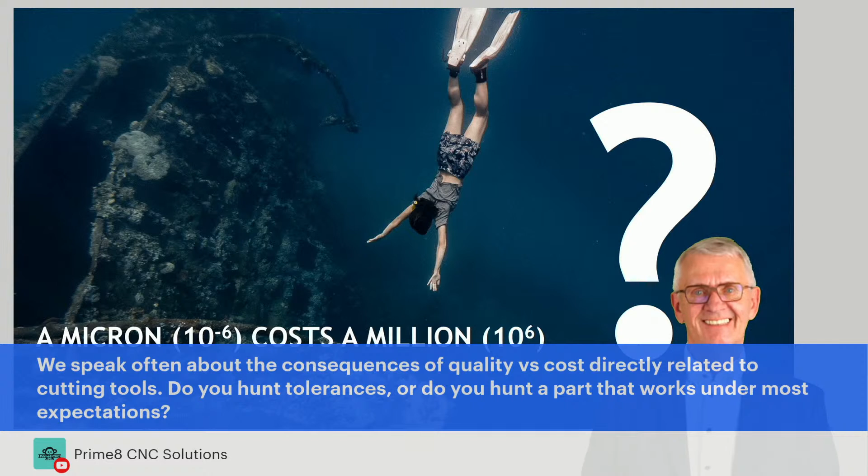I like the question. I see it like this, and I trust the designer of a workpiece knows what he's doing, although questions can be asked about people working with too high safety margins. But let's say if on a drawing a tolerance is given of plus minus one tenth, just as an example. The moment you do machining and the result is within that tolerance field, and again I suppose the designer knows what he's doing, that is okay. Then it's fine. Now it's deep in the genes of a machining person.

I suffer a bit from that also. If it says 100 plus minus one tenth, the machinist is going to strive for 100 exactly. And then of course things go wrong. That's what I said about chasing a micron costing a million, because if you chase something just to prove to yourself or colleagues what you can do, when it's not needed, then it's a bit of a waste of money and time. So if the designer knows what he's doing, and a workpiece has the quality demanded, that's good enough. Doing better than what's asked for just costs money and time. I don't know if that gives an answer.